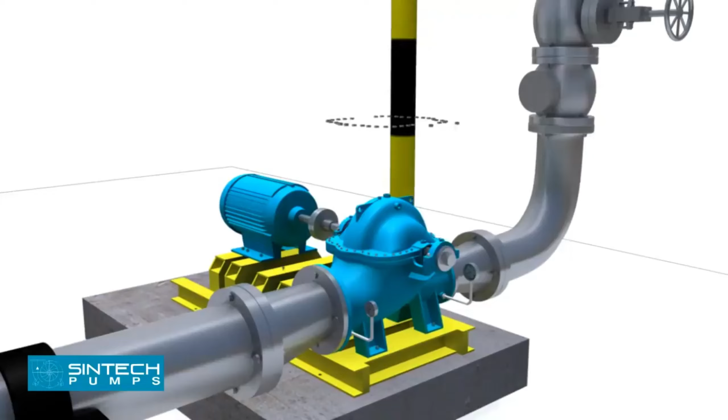The split casing design allows removal of the impeller and bearing housing assembly without disturbing suction and discharge piping.

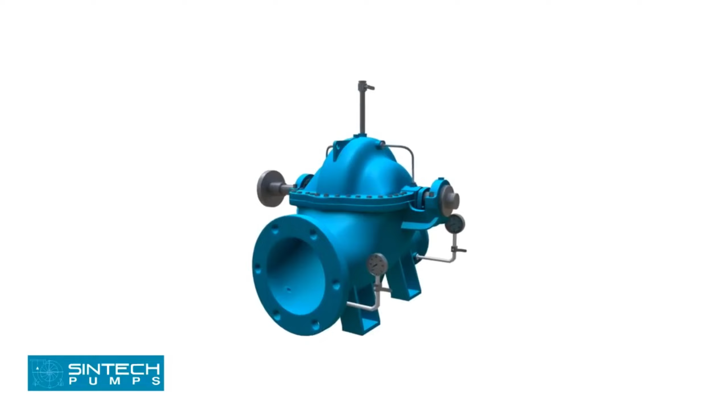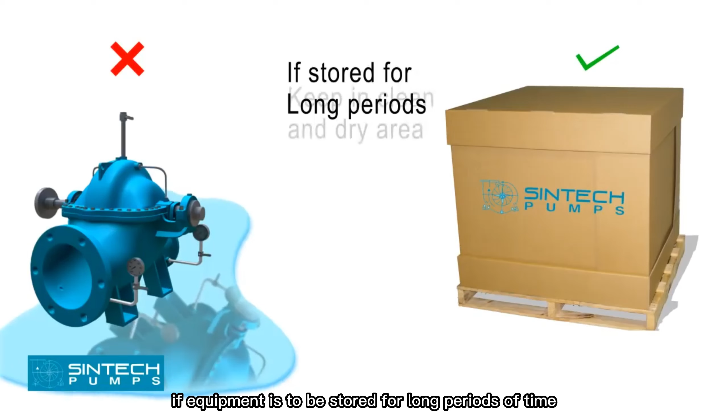Storage and protection. All pumps are shop tested and ready for operation when delivered. If equipment is to be stored for long periods of time, 6 months or more, it should be kept in a clean, dry area, and the following precautions should be taken to ensure the equipment remains in good condition.

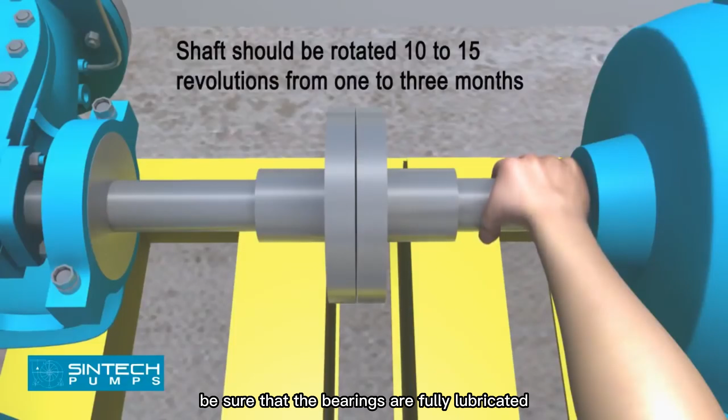Be sure that the bearings are fully lubricated. The shaft should be rotated 10 to 15 revolutions by hand periodically in order to spread the lubricant over all the bearing surfaces. Suitable intervals are 1 to 3 months.

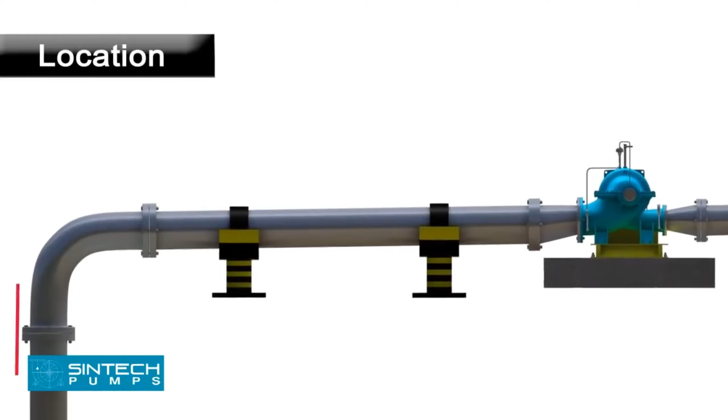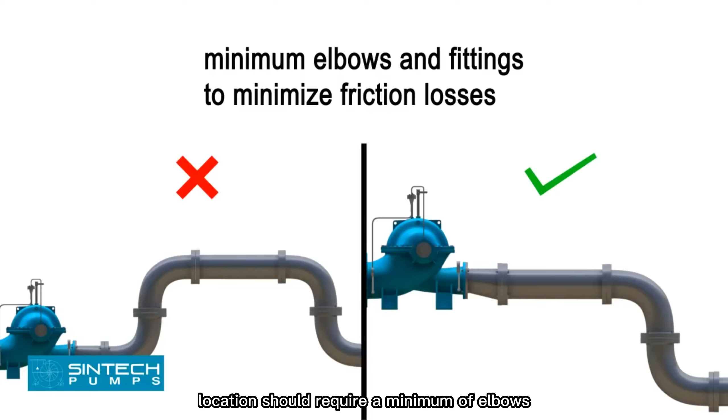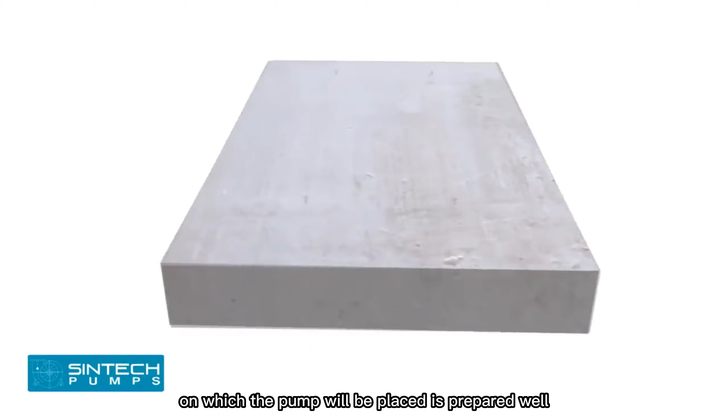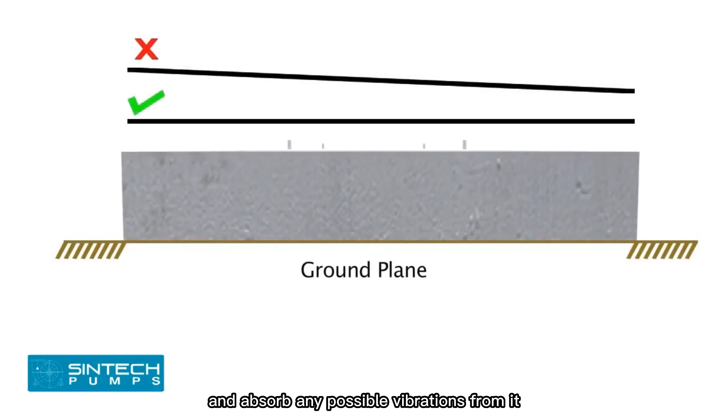Installation. The pump should be located as close as possible to the liquid supply so that the suction line is short and direct. Location should require a minimum of elbows and fittings in the discharge line. Before installing the pump, ensure that the foundation on which the pump will be placed is prepared well. It has to be sufficiently substantial to take the weight of the pump and absorb any possible vibrations from it. The foundation has to be absolutely straight, without any inclination or tilting on any side.

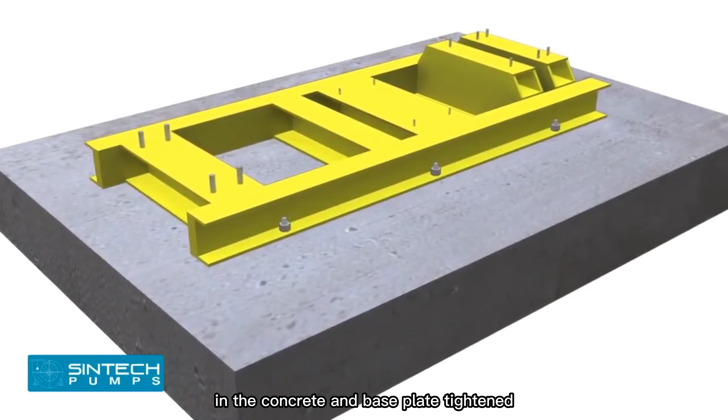The foundation bolts of proper size should be embedded in the concrete and the base plate tightened, ensuring that it is leveled in all directions.

Suction piping in case of static suction lift condition: negative suction.

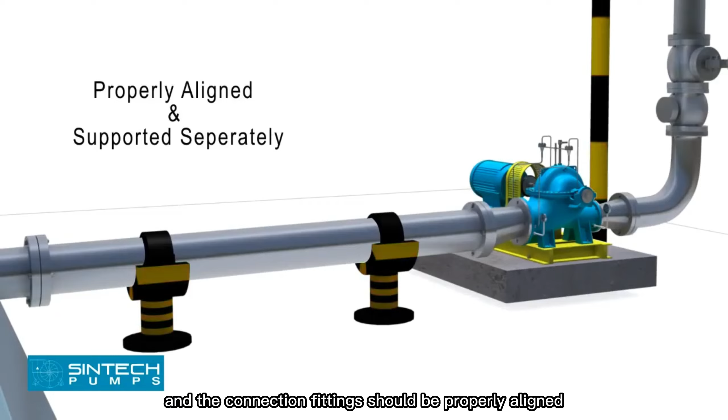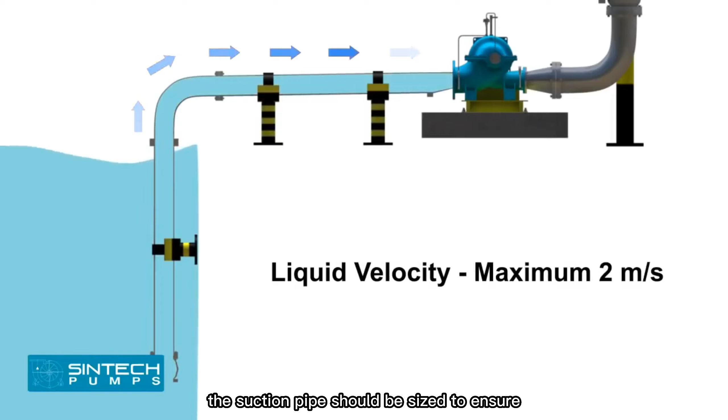The piping run and the connection fittings should be properly aligned and supported separately. The elbow should be of long radius type. All suction piping must be airtight. The suction pipe should be sized to ensure a liquid velocity of not more than 2 meters per second.

All suction pipes should have a continuous rise to the pump suction inlet. A 6 mm per 400 mm slope is recommended. The recommended suction pipe size should be at least 1 commercial size larger than the opening of the pump inlet.

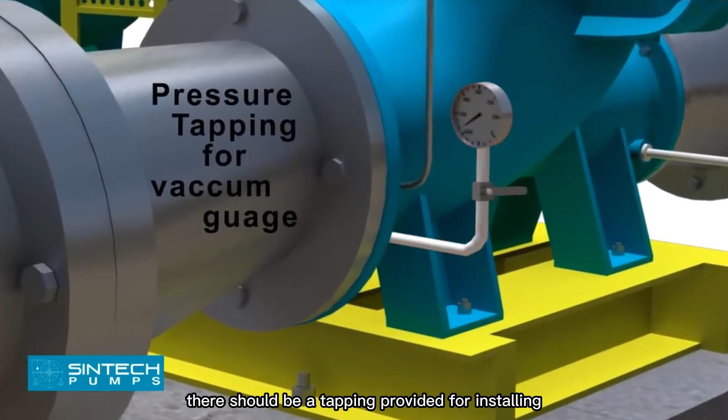No isolation valve is recommended. There should be a tapping provided for installing a vacuum gauge in the suction line.

The reducer joining the straight length of the pipe in the pump inlet should be an eccentric reducer, with the inclined side of the reducer as the bottom side. The straight length of the pipe after the eccentric reducer should be 2 times the pipe diameter.

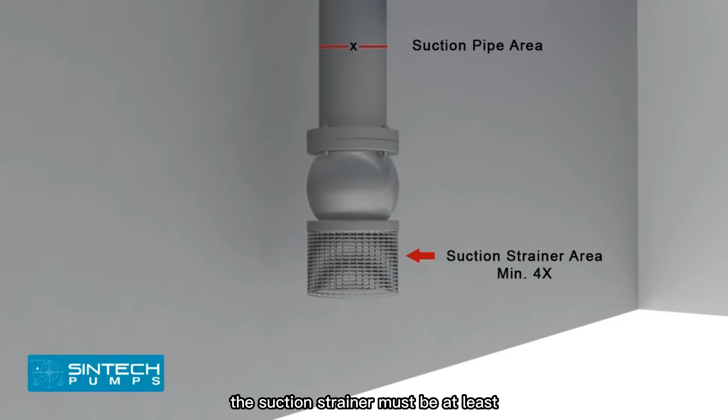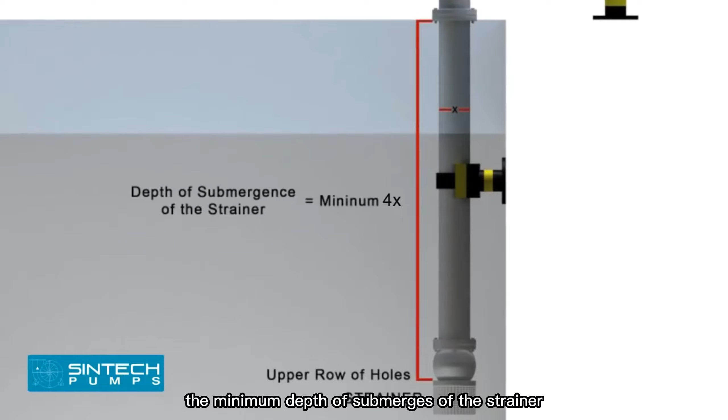The suction strainer must be at least 4 times the suction pipe area, and the mesh size should screen out solid particles that could clog the impeller. The minimum depth of submergence of the strainer should be at least 4 times the pipe diameter, measured from the upper row of holes of the strainer. The distance between the bottom of the strainer and the floor of the tank should be considered as 2 times the pipe diameter.

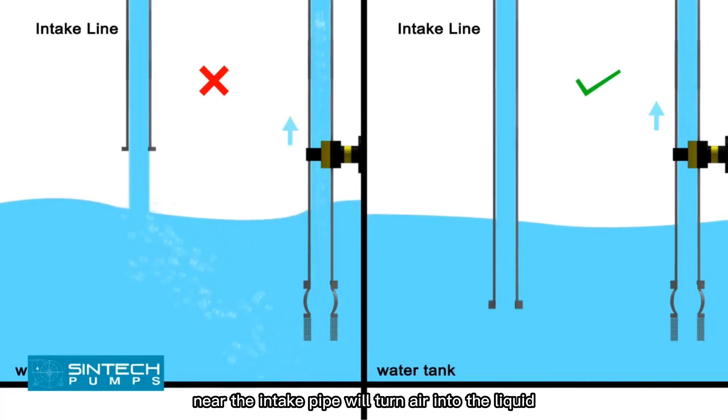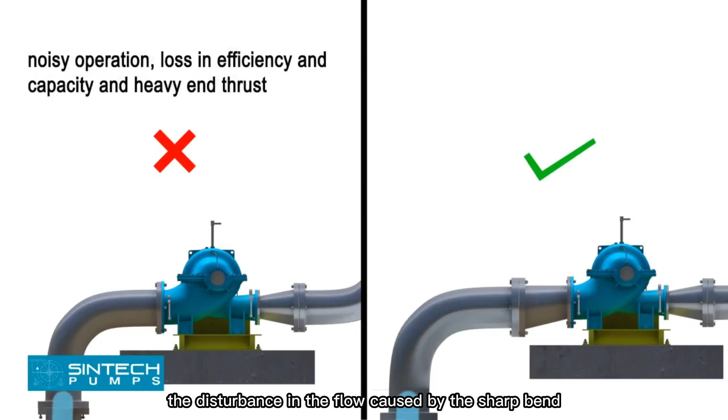A stream of liquid falling into the sump near the intake pipe will draw air into the liquid. The supply line should extend down into the liquid. A short elbow should never be bolted directly to the pump suction nozzle. The disturbance in the flow caused by the sharp bend so near the pump inlet may result in noisy operation, loss in efficiency and capacity, and heavy end thrust.

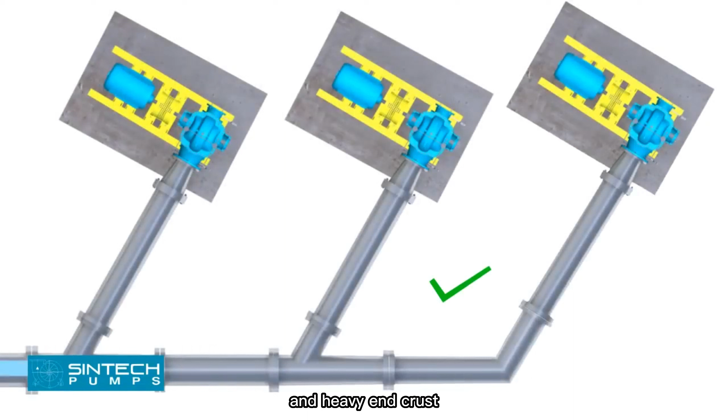If separate suction lines cannot be used for each pump, then a tapering header with Y branches should be used. A straight branch header should never be used.

Suction piping in case of flooded suction condition: positive suction.

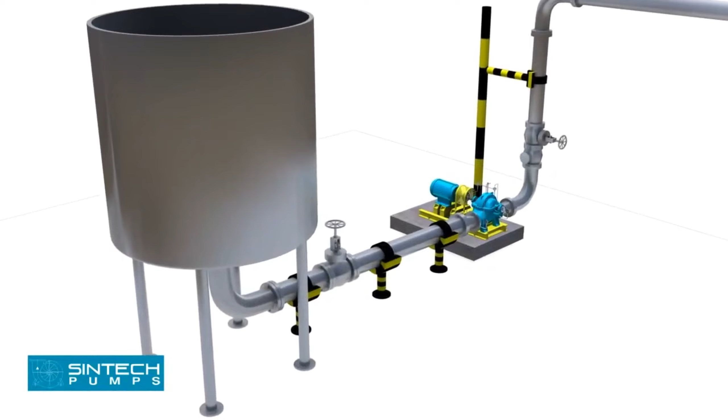In case water is being supplied to the suction through gravity, for example an overhead tank, a slightly different setup is needed.

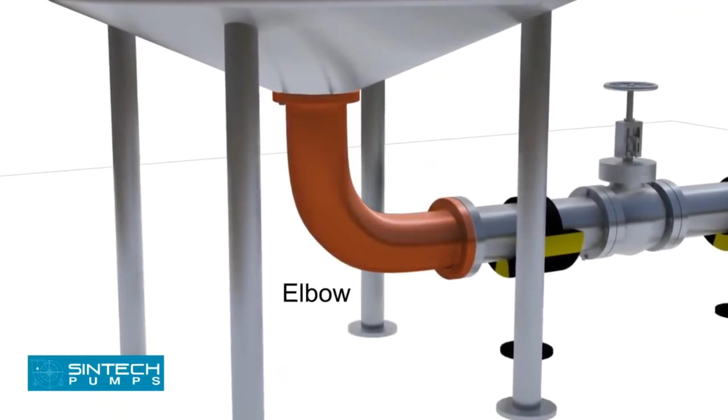The elbow should be of standard type or of the long radius type. An isolation valve should be provided in the suction line.

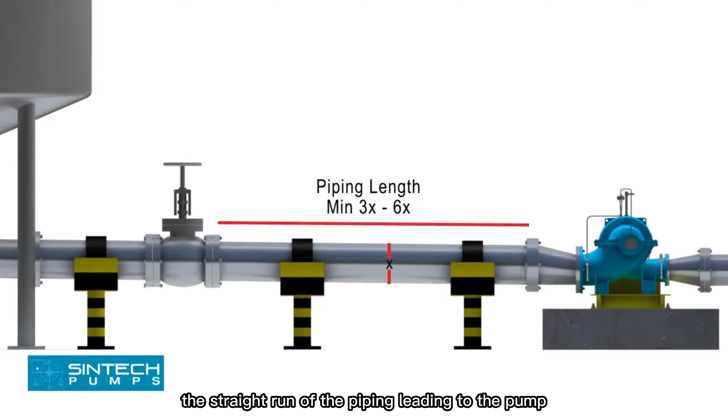The pipe supplying from the tank into the pump should have a descending inclination. The straight run of the piping leading to the pump suction nozzle should be at least 3 to 6 times the diameter of the pipe from the upstream elbow.

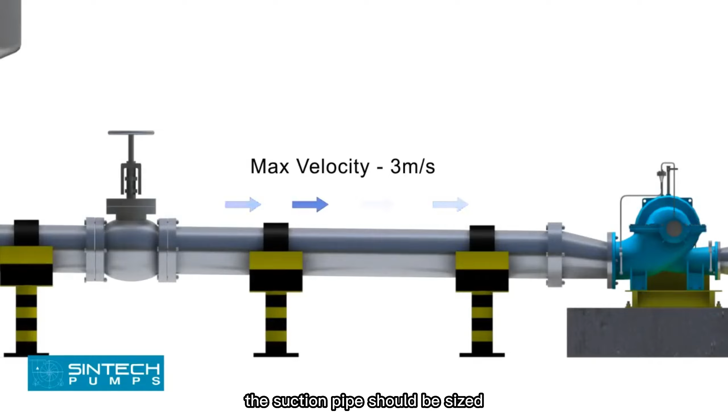The suction pipe should be sized to ensure a liquid velocity of not more than 3 meters per second. There should be a tapping provided for installing a pressure gauge in the suction line.

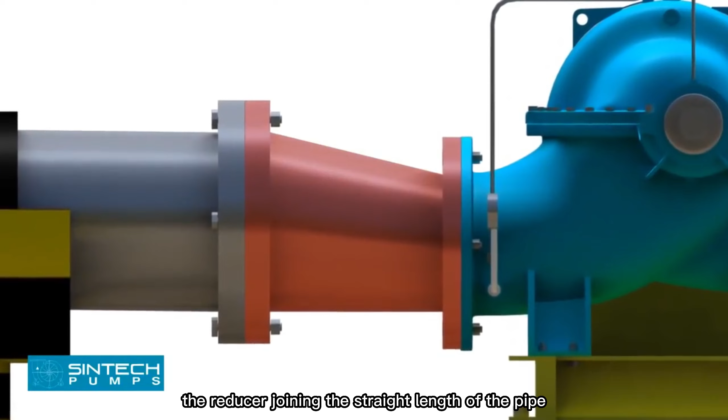The reducer joining the straight length of the pipe in the pump line should be an eccentric reducer, with the inclined side of the reducer as the top side.

Stuffing box seal connections are usually made from the top of the pump casing. If the liquid being pumped is unsuitable for sealing, then it is preferable to bring fresh, cold water to the seal connections from an outside source.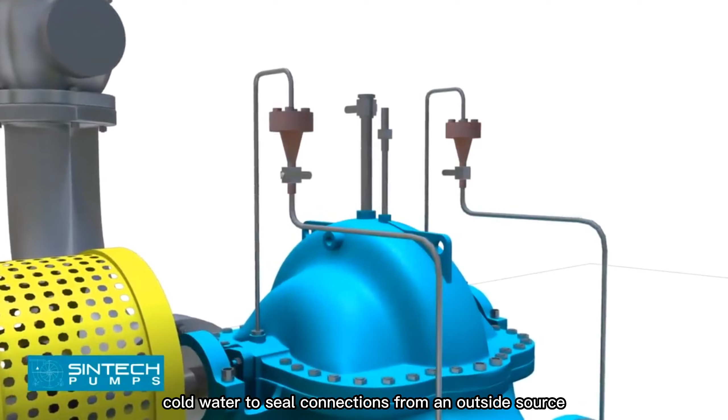Centrifugal separators or other filters may be used to remove abrasive particles from the liquid being pumped, if an outside source is not available.

Description of the discharge pipe. The piping run and the connection fittings should be properly aligned and supported separately, to reduce strain on the pump casing.

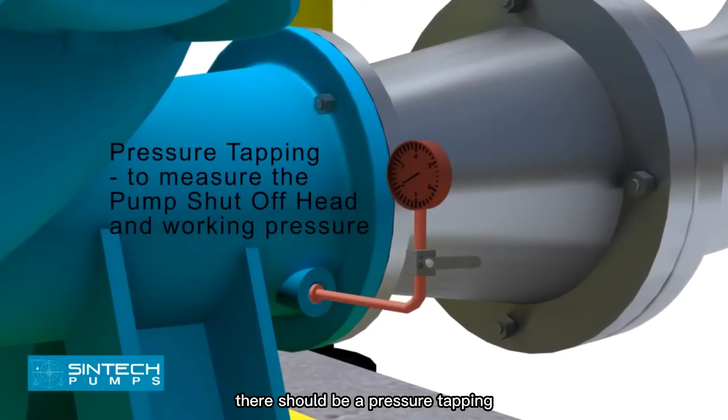There should be a pressure tapping as close to the pump outlet and before the isolation valve as possible to measure the pump shutoff head.

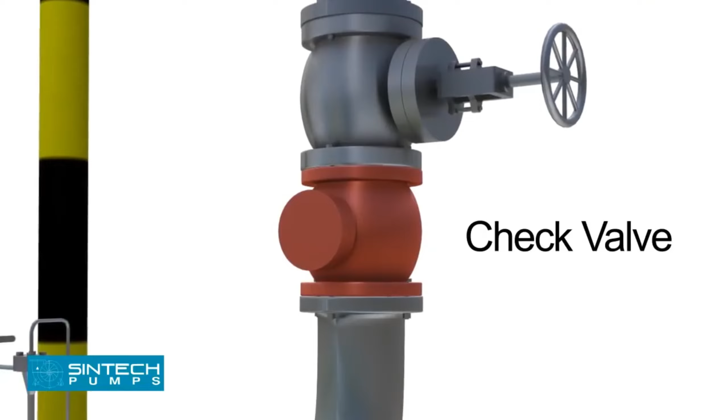Concentric reducers are installed in the discharge pipe to minimize friction losses. The check valve used in the discharge should be of non-slam type to prevent reverse flow and protect the pump from excessive back pressure.

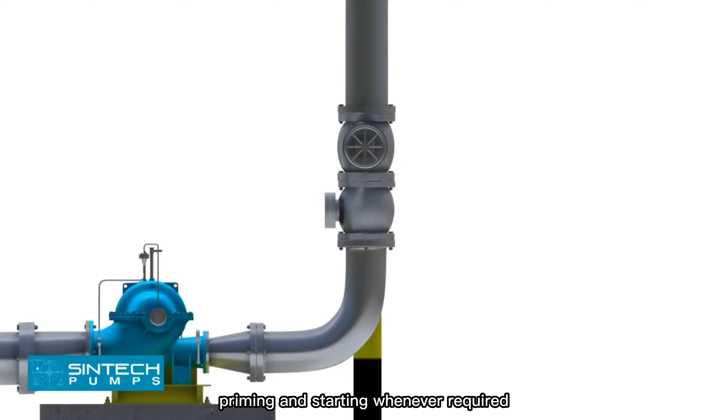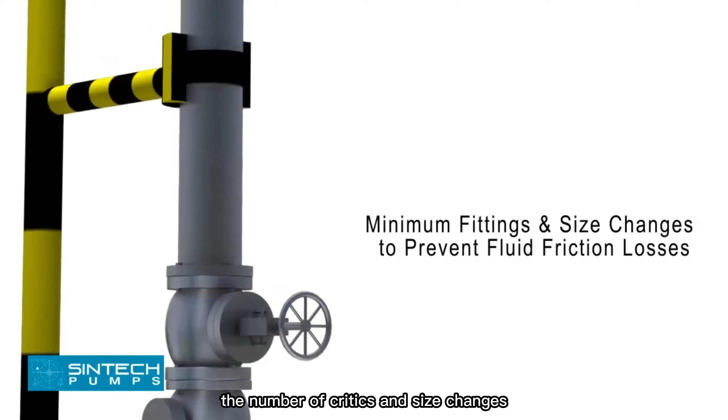The isolation valve is provided downstream of the check valve so that it can be taken up for maintenance, priming, and starting whenever required. The recommended discharge pipe size should be at least 1 commercial size larger than the opening of the pump outlet. The number of fittings and size changes should be minimum to prevent fluid friction losses.

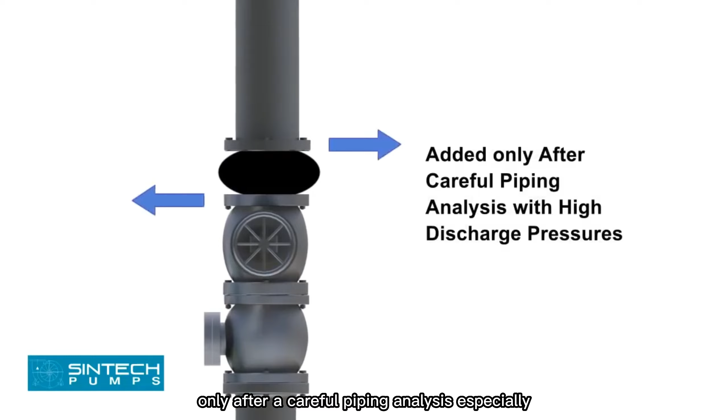Expansion joints may be used only after a careful piping analysis, especially when the discharge pressures are on the higher side.

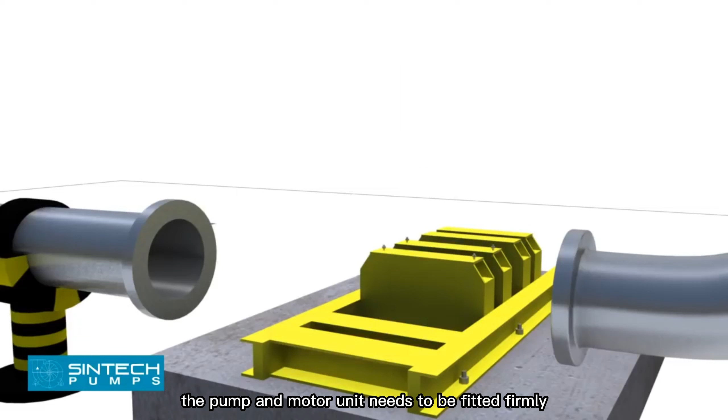Installation of pump and prime mover. The pump and motor unit needs to be fitted firmly onto the base frame using nuts and bolts before fitting any pipes. It is essential to confirm the distance between the shaft ends.

In the subsequent step, the pump and motor are aligned to the final tolerance using a reverse dial gauge or a laser alignment tool.

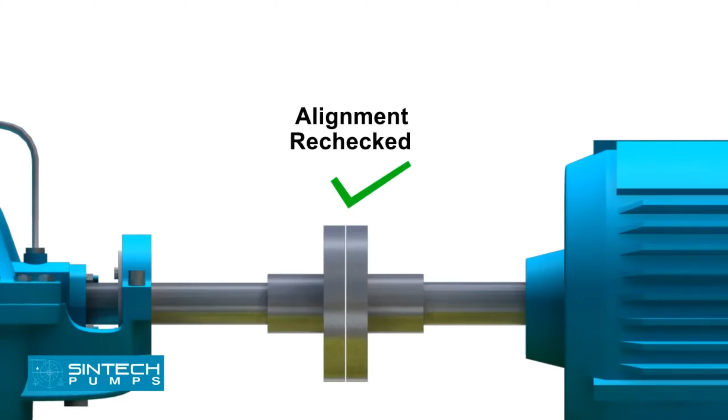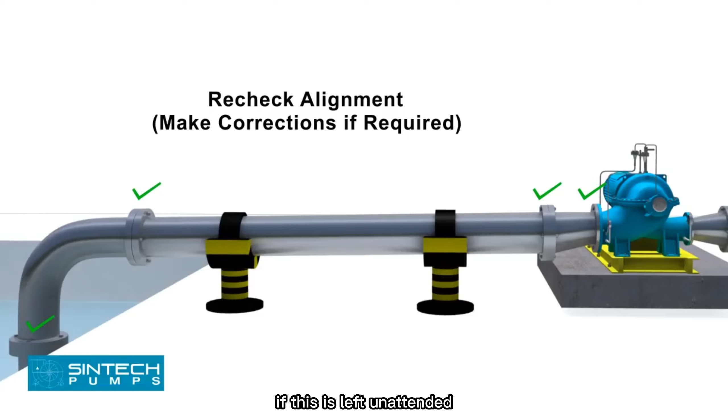After the alignment is completed, the piping associated with the pump should be bolted. Once this is completed, the alignment should be rechecked and similar readings should be obtained. If this is not the case, then the piping should be investigated and suitable corrections should be made. If left unattended, it can cause stress on the pump casing. Misalignment may be the cause of noisy pump operation, vibration, premature bearing failure, or excessive coupling wear.

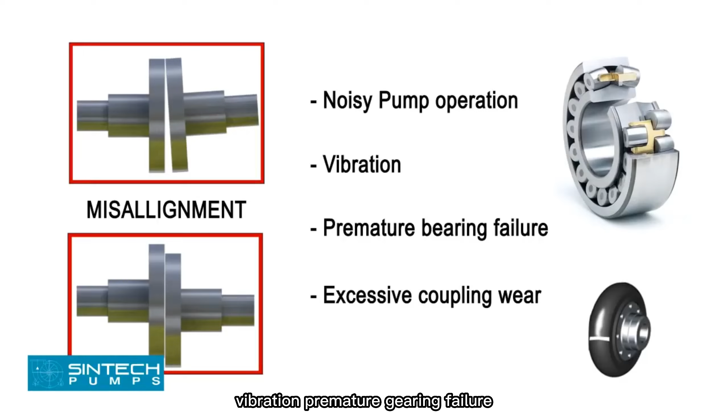Once the pump and motor have been coupled, test the movement manually by rotating it by hand to see if it is rotating smoothly.